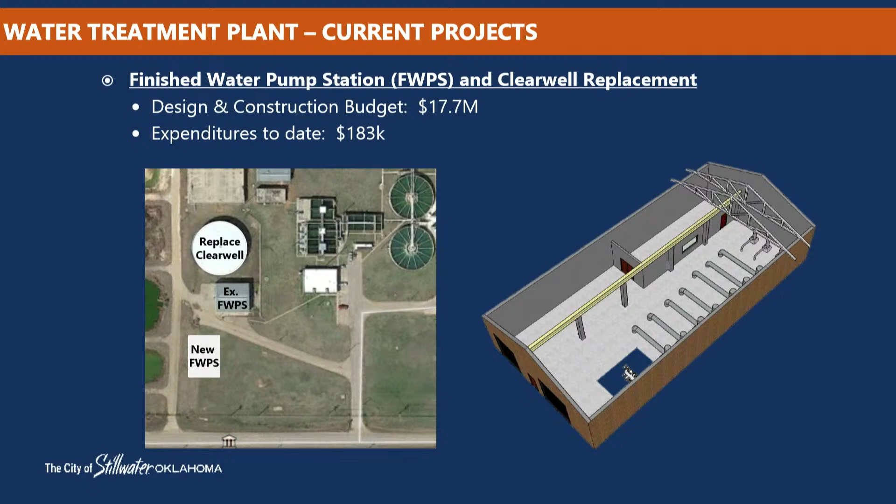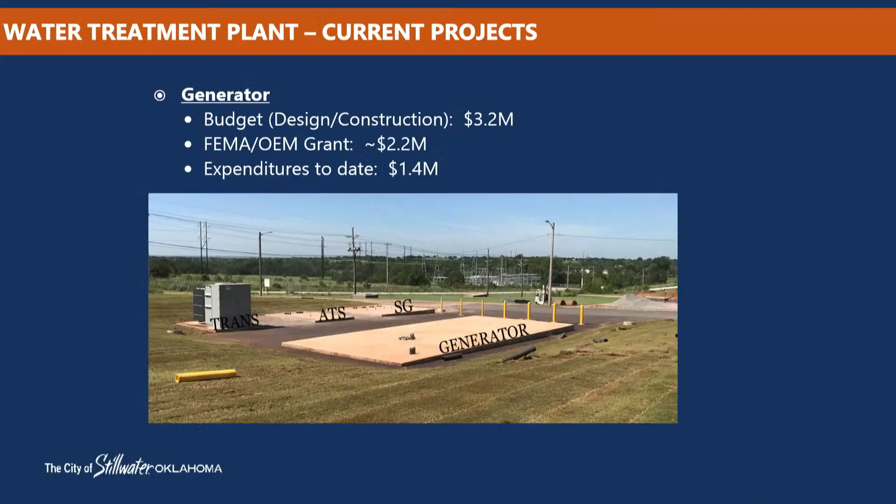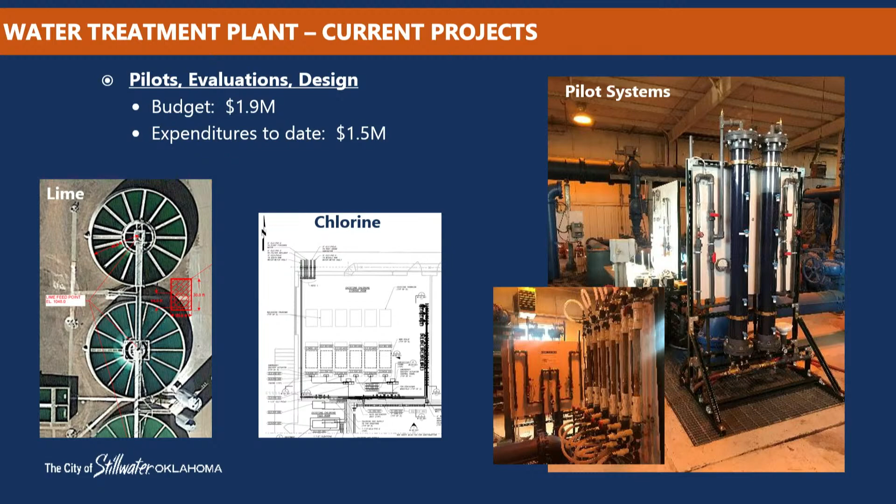This all started with that current project I mentioned, which began with the need to replace the lime system. That is this X right here. Lime is crushed limestone, and that's added in these three SCU basins.

Our plant is called a softening plant, and that's what the lime does - it softens the water and helps settle out solids, coagulate, and make it easier to flocculate the floatable solids. That's kind of the heart of it, in those SCU basins.

About the same time we started the project to replace the lime system, we had changes in key staff, and it came to our attention that there were a whole lot of issues out there. That project evolved into a full evaluation of the water treatment plant, identifying all our needs and prioritizing them. All these red X's are a summary of that - they indicate places where we have issues that need to be addressed.

Some of these, the X on the right, represents the chemical feed, particularly the ammonia. In 2017 we had a failure of the ammonia system, which resulted in significant consequences and a high cost to address. The lime system I mentioned frequently needs maintenance, and it's old enough that its spare and replacement parts are obsolete and hard to get.

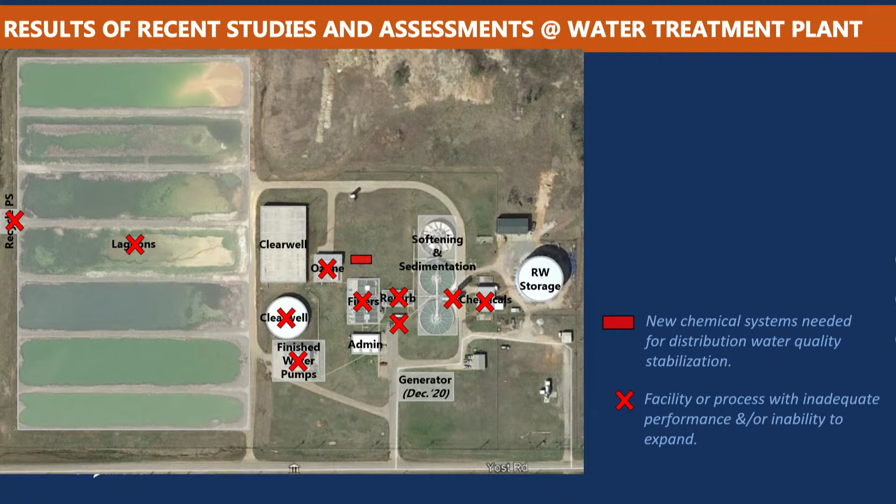Due to all these needs and the prioritization I talked about, we've developed a draft facilities plan with the help of a consultant. We've talked with you all about this previously. This is representative; we have some options we haven't selected finally yet. But this shows up in the box that improvements to the existing plant plus expanding it to a higher flow rate would cost about $70 million.

As we started the assessment we're talking about tonight, we wanted to evaluate needs that are not immediate but upcoming in the near future. Some of those I've mentioned: the residuals, liquid and solids, the finished water pump station, an administrative lab and electrical building, and some other miscellaneous items. So here we're looking at approximately, probably in excess of, 100 million dollars over the next several years in needs for the plant. So as we pulled together the facilities plan and realized the magnitude of the need, that's the time when we say, okay, this is a huge investment.

Is it time to reconsider whether we make that investment here or whether we look at other alternatives? So this also represents what we've been working on. This is our current path forward: improving the plant, making it the long-term investment that's in the best interest of our ratepayers.

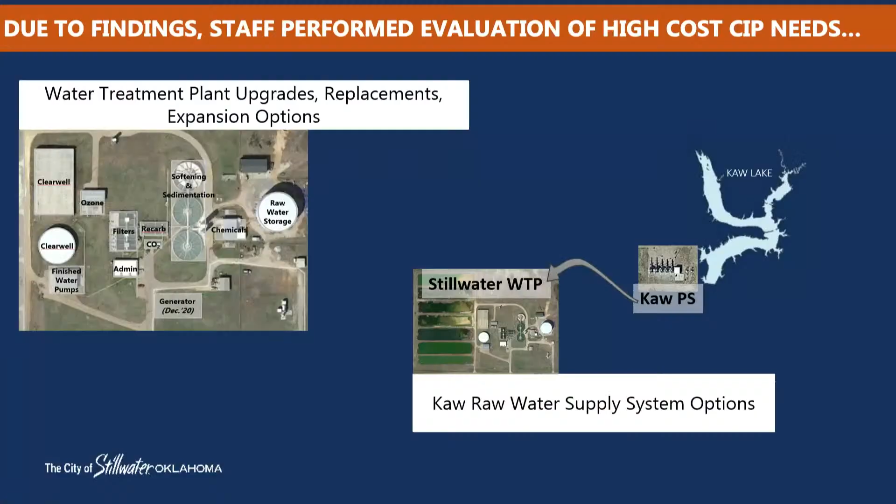Sorry Bill, can you talk a little more about whether that 24 MGD number is a goal for a specific reason? Is that what we think we need now, or a projection of what we think our needs will be in the future? Come back to this map: you can see the 3 SCU basins I mentioned, kind of almost in the middle. Each of those has a capacity of 6 million gallons per day. So when we think of increasing, the natural increase is to add another one of those to the north and increase the capacity by 6 MGD. So that's the reason for 18 and 24.

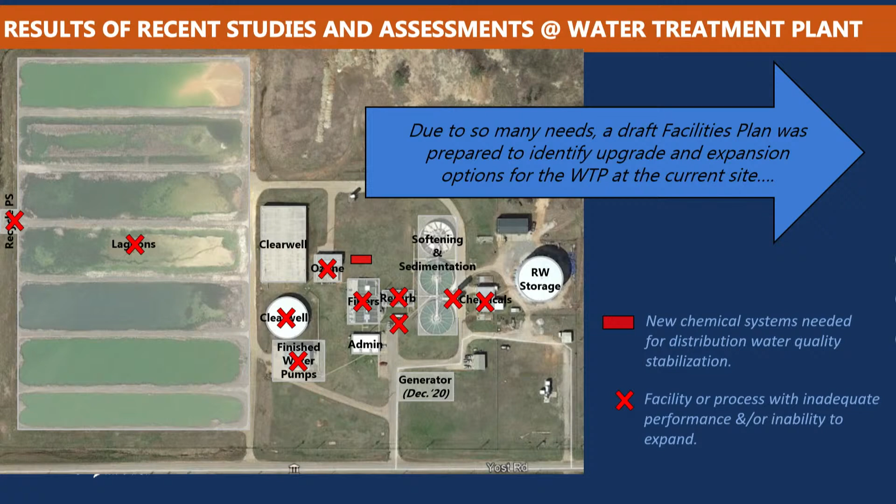We're not at the point of needing to expand to 24 today. We'll talk later about when we will be.

With the facilities plan I've talked about, we've told our consultant we're not ready to go to 24, but we expect it's going to happen someday. So if we're designing a new facility, a new filter complex, we want to design it so it's ready for 24, or so it's easily expandable. We don't want to build a new one for 18 and then in 5 years be going, okay, we're ready for 24. So the turquoise color at the 4th SCU at the top there, and that meter vault, are essentially the only new infrastructure we would need at this plant to go to 24.

Now, we need a lot of rehab and upgrading of other things, but beyond the current rehabilitation project, that would be the only thing to add to make that plant ready for 24 - plus some additional pumps, small facilities inside a building that's been set up and ready for it. Does that answer your question? Yeah, it does. Thank you.

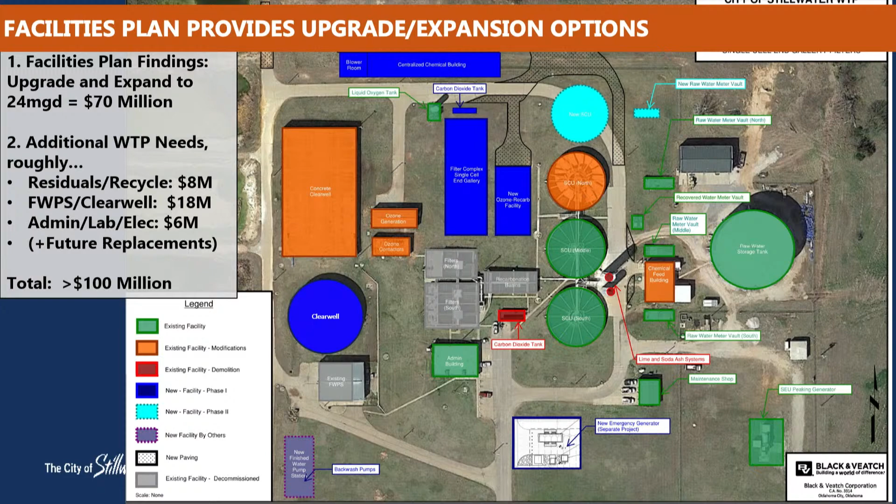So the four options - I'll start with number one, which relies most heavily on the existing plant. We rehabilitate, upgrade, and replace a number of facilities at 18 MGD, being prepared for 24, and then at some point we will expand to 24 MGD. We stay with the existing site. We design the new facilities for a 50-year life.

We've estimated when that expansion to 24 will come. We've estimated other small improvements that may need to happen sometime - something that's in good condition now, but we don't expect it to last for 50 years. So just to be clear on that, 50-plus year life is 50 years after all of those things are completed, right? Not 50 years total. In other words, if the plant's 40-plus years old now, we're not getting an extra 10 years out of this. Right.

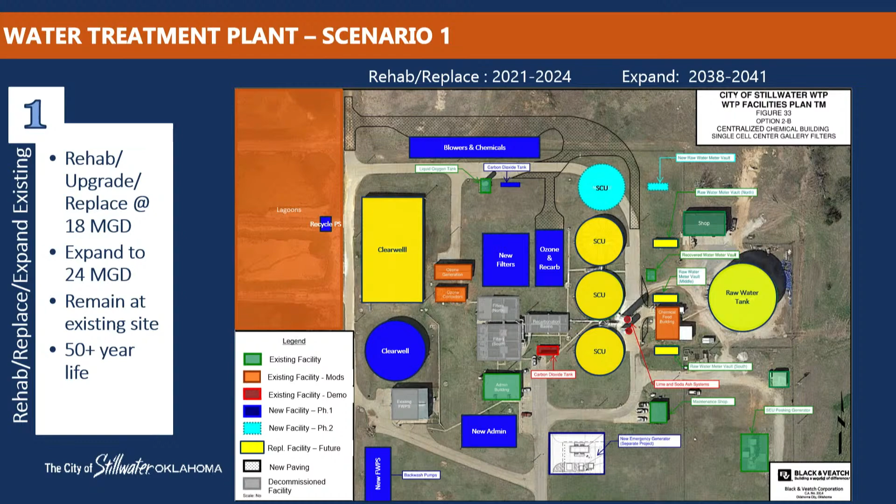So expansion to 24 MGD, roughly at the year 2038. Scenario 2 would include limited rehab at the existing plant, less than what we would do under scenario 1. There may or may not be room on that site to expand or build a new plant, so we're assuming we'd have to acquire a new site. We would build a new water treatment plant, but in 2 phases. The first phase would be 12 MGD, roughly 2031. And then a second 12 MGD part of the same new plant in roughly 2041. So during that period from 2031 to 2041, we're running 2 plants, but kind of phasing out the existing treatment plant, putting less investment into it, probably using it more as a peaking plant during the summer rather than all year.

Moving to scenario 3, similar to 2, it's a new 24 MGD plant, but we build it all at once in the year roughly 2031. This is essentially the same limited rehab at the existing site, and once the new plant is constructed and online, we would abandon the existing treatment plant.

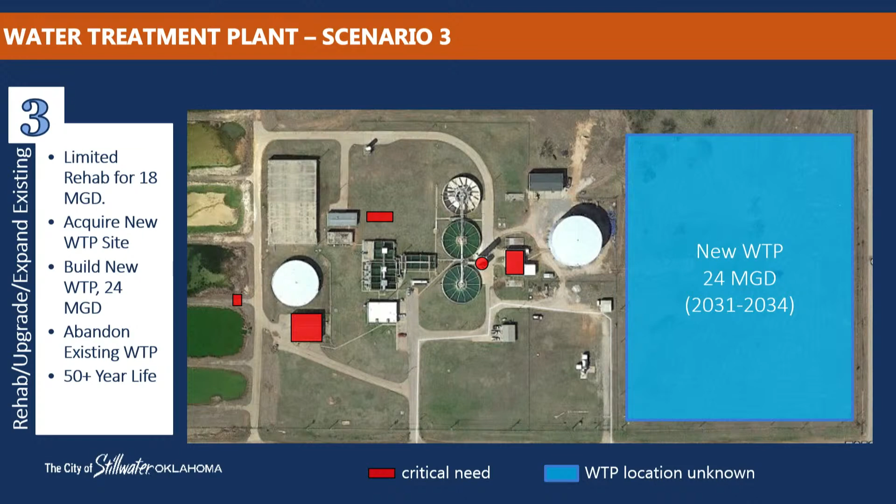Scenario 4: we do no rehab at the existing treatment plant. We just keep it running. We construct a new plant starting now, instead of 2031. And then once the new 24 MGD plant is online, we abandon the existing water treatment plant.

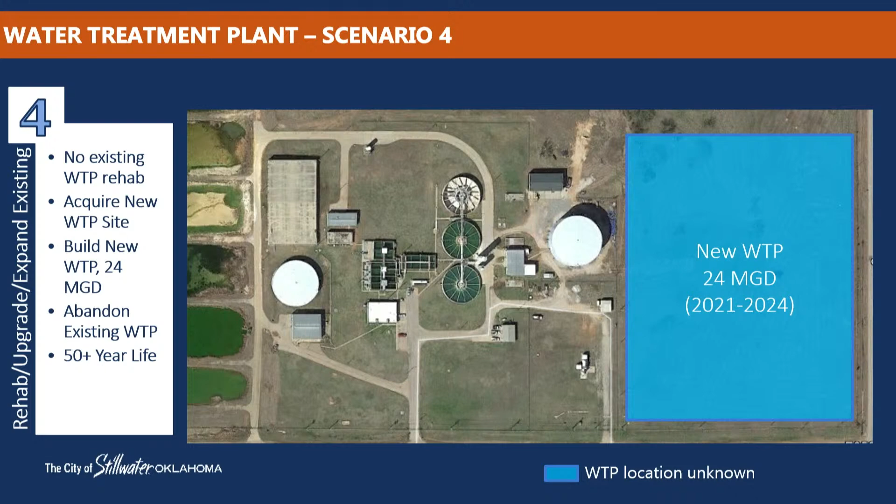This slide just brings them all back together, hopefully making it easier to visualize the differences. So looking at these options, we developed them to wrap our arms around the issue and the potential scenarios, but not to select one of these. That's not the main question here. Probably the key question is whether it's time to move toward building a new water treatment plant, and whether we have enough information today to make that decision.

So, Bill, can I ask a question real quick? Sure, and maybe this is something that can be answered later. You're right, we're not having to select a solution tonight, 1, 2, 3, or 4. And maybe this is a silly question, but you will know the answer to this. Do you think water technology is going to change a lot in the next 11 years when we're talking about 2031? Do you see anything significant to where we would wait 11 years to start something, as opposed to starting something now and building on as technology changes? Do you see one way or the other as far as what would be a better thought process? Does that make sense? Yes, I think so. But thanks for setting me up, though, telling me I would be able to answer the question.

Just briefly on these scenarios, in terms of the difference between a whole new plant and upgrading the existing plant. When we look at scenario 1, with all the different things that would be either replaced or upgraded, once that rehab and replace timeline, 21 to 24, is done, would the facilities at the existing treatment plant still not be as good as they would be if we built new?

And why would they not be? I mean, simplistically, I'm looking at it like a Lego sort of building, where you pull out that old piece and plug in the new one, and now that new piece is just as good as it would be if you built a brand new plant. If we're pulling out the old bad stuff and putting in new good stuff, why is that rehab plant not at the same level as a new plant would be? Does that make sense? Partially because all the Lego bricks may not fit right back in the same slot.

Okay, so we're not upgrading or replacing every facility at the water treatment plant. You've got piping, wiring, a lot of connections, things that are feeding different directions that maybe you would put, if you were doing a new plant, side by side, but when we're rehabbing, you can't do that because there's no room.

I can't think of a good example, but we're not replacing everything. If we were replacing everything, then you'd be spot on. So it's like a home remodel: instead of tearing the whole thing down and building it brand new, I'm putting new stuff in, but my old layout may still be kind of wonky. I really wish my laundry room was on the other side of the house, but I've got a new washer and dryer, and the layout's still bad. Or your foundation wasn't so good, and so you're potentially, the good bones metaphor that Monty used earlier is part of that.

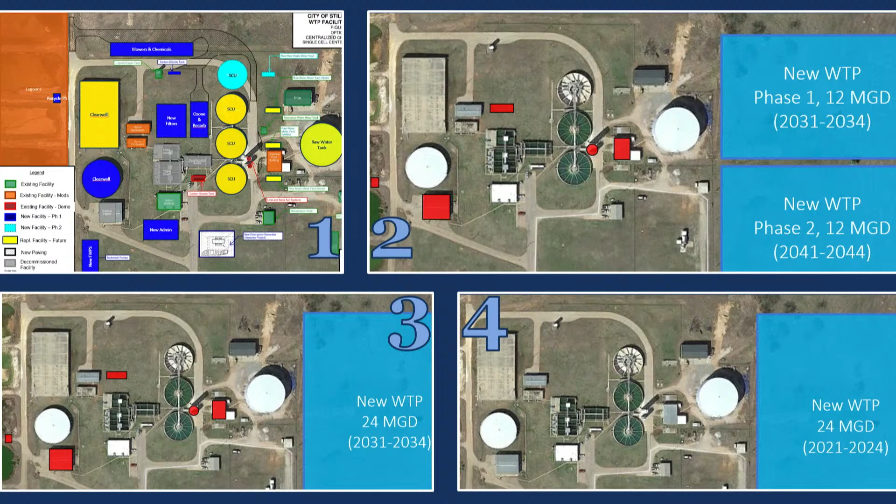Okay, anything else on the scenarios? So at Kaw Lake, we have 50 MGD of water rights, so in that regard we're set for the foreseeable future. We have completed water line and pump station improvements based on an evaluation back in 2012.

And currently we are developing an RFQ, kind of along the same lines that I talked about improvements at the water treatment plant. We're doing the same at Kaw and developing this RFQ to further evaluate and recommend action on the next steps to rehabilitate the Kaw water line.

They were constructed just a couple of years ahead of the water treatment plant. The water line, as you've probably heard in the past, needs attention to rehabilitate its condition, and it will not carry 24 MGD. It'll carry our current treatment capacity of 18 — I think it carries about 21.

There are challenges to a more in-depth evaluation of the condition of the water line. That's why that wasn't completed in 2012.

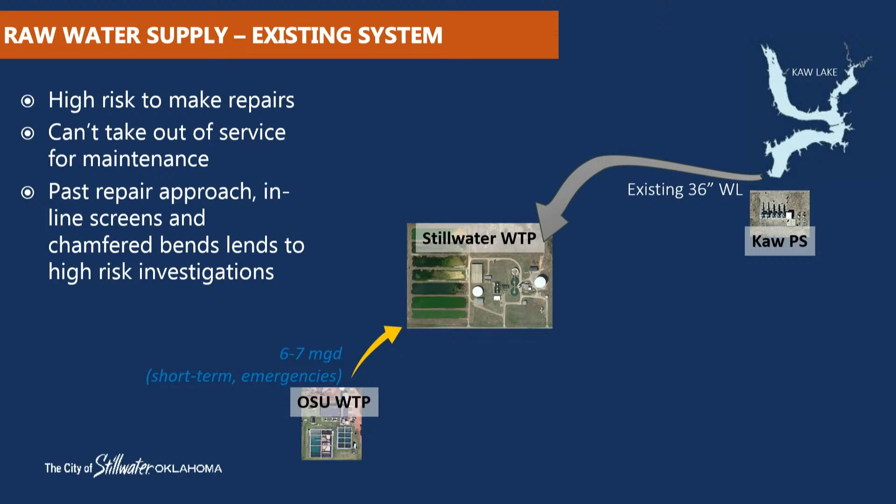Yes sir, in that there is no redundancy in the pipeline. But the pump station, for instance, has multiple pumps — there's 5 pumps, 2 large and 3 small. So the 2 large are redundant, so if one of them needs repair or fails, you switch to the other one. You use the 3 smaller ones seasonally, switching between the 2 sets of pumps. So we have some redundancy there.

And through these scenarios we'll talk about condition, capacity, and redundancy. So unlike the water treatment plant scenarios where all 4 options were equal, these are not. For instance, redundancy — I'll explain it as we go through them.

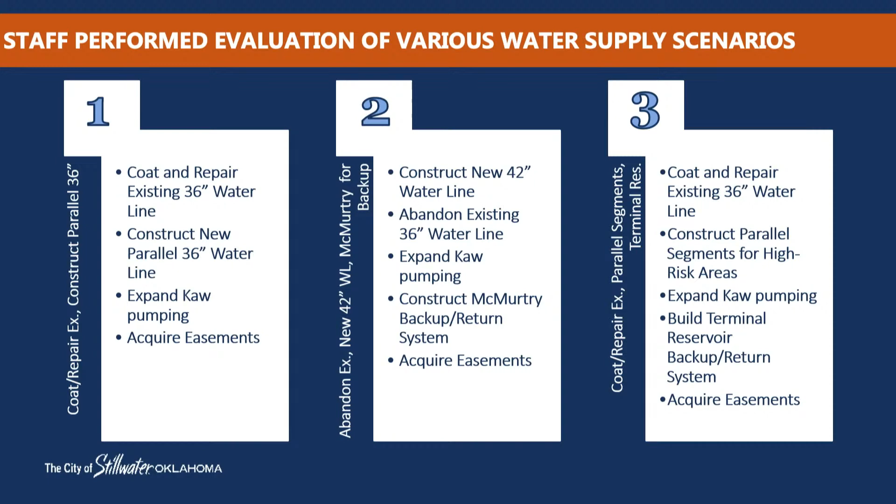So looking at scenario 1, it would include coating and repairing the existing 36-inch water line, constructing a new parallel 36-inch water line, and expanding the Kaw pumping station. So as you just mentioned, Trustee, having 2 lines, now we're not down to one weak link, we can switch back and forth. However, in that scenario, we're still vulnerable to a pump station outage or a lake outage, if something quality or water quality wise or mechanical happens at the lake.

And note there at the bottom of the screen, I've got the OSU water treatment plant. We have an agreement with OSU to back each other up in times of need. They can, and both are able and willing to do that. The issue is they could not support us in the summer — they just don't have that capacity. So in the winter, for a planned outage, and for short times at other times of year, they could help back us up.

Scenario 2 includes a new 42-inch water line, abandoning the existing 36-inch water line, and expanding the pumping, just like with scenario 1. But this also includes developing the infrastructure to utilize Lake McMurtry as a backup system.

You mentioned on these options, mixing and matching. There's the water line issue itself - do we build a parallel, do we build partly parallel, do we just replace it with a new one? That seems separate from the reservoir issue - do we build our own reservoir for storage, do we connect to McMurtry? From the perspective, it seems fairly straightforward: building just segments of parallel would be the cheapest option, building a second 36-inch line parallel would be the second cheapest option, but replacing the whole thing with 42 would be the most expensive. Is that right?

Possibly, I don't remember the numbers, because if we build the parallel, the 36 is cheaper than a 42, but we'd have to rehab the old 36. So that adds some of the cost. Whereas if we build the 42, we're just getting rid of the other 36. Correct. What's the difference in capacity if we had one 42 versus two 36s? Is it linear?

Two 36-inch lines are... well, it's not linear for that size. It's linear for the cross-sectional area of the pipes. Sure, two 36s would definitely carry a lot more than one 42. The right thinking with that is...

When you've got two 36s with either line, say in the winter, you could just use one and rehab the other. So each line has to be big enough to handle the average flow. You said right now the current 36-inch line has a capacity of about 21 million gallons a day. Yes, sir. So would we normally use one at a time, or how would that work? Would they both be flowing? Yeah, until we grow into needing all that capacity, we'd probably use both to keep them both in service, but we could get by on one or the other if we needed to shut one down and fix it. Correct.

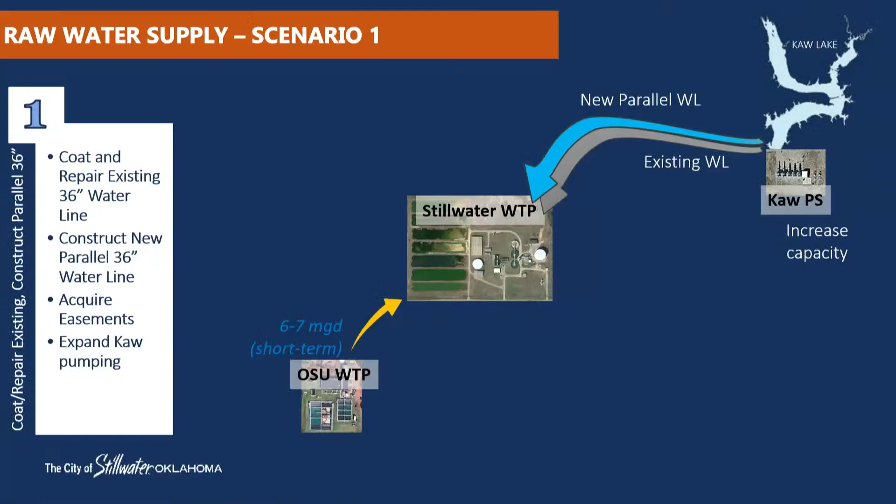Would it make sense to do that in stages? If we're talking about just doing segments of parallel lines now on the most critical areas, then over the next several years we continue to add sections so we eventually end up fully parallel. Yeah, that could be a hybrid between option 2 or 3, scenario 3 and option 1 — either of the other ones. Could be the first step towards that.

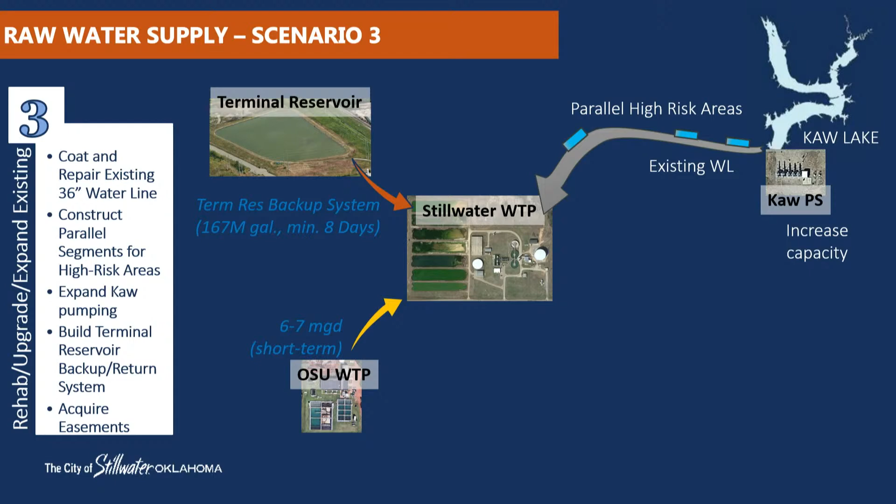I think what this would do is it doesn't increase your odds of having a line break, but it decreases your odds of having a catastrophic line break that you can't fix, and one that takes a very long time.

And just to be clear, the money in that slide is in addition — none of that's cumulative with the water treatment plant itself, right? Correct.

Wishful thinking. Yeah, nice try. At least they're not as big.

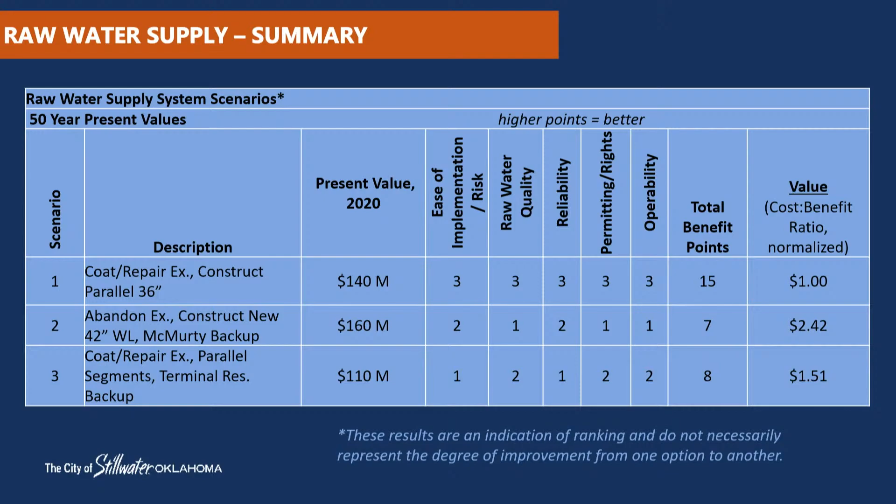Okay, now I'd like to talk a bit about the capacity that we've alluded to several times. Currently at 18, and we believe that as a growing community, we're going to need to expand to 24 MGD someday. That is not imminent, but how do we know when it is?

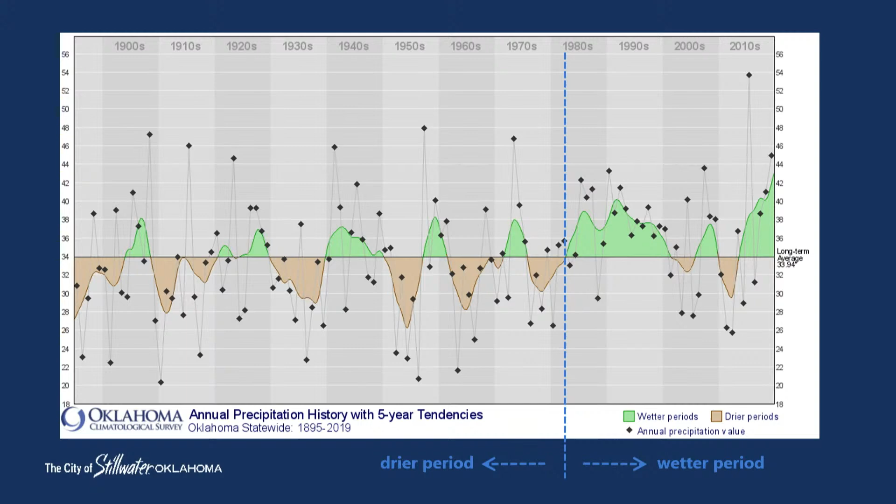We can't say that with certainty, but it seems to make the data make more sense. There's also in the last 30 years a pretty big expansion in water saving technologies, right? My toilets and shower heads and all that stuff are conserving more water than they did 10, 20, 30 years ago. That could be part of it. Could be better water devices, could be more environmentally conscious customers, or as rates have gone up over time, people have become more cost conscious and cut back to save money. So a lot of things can go into it.

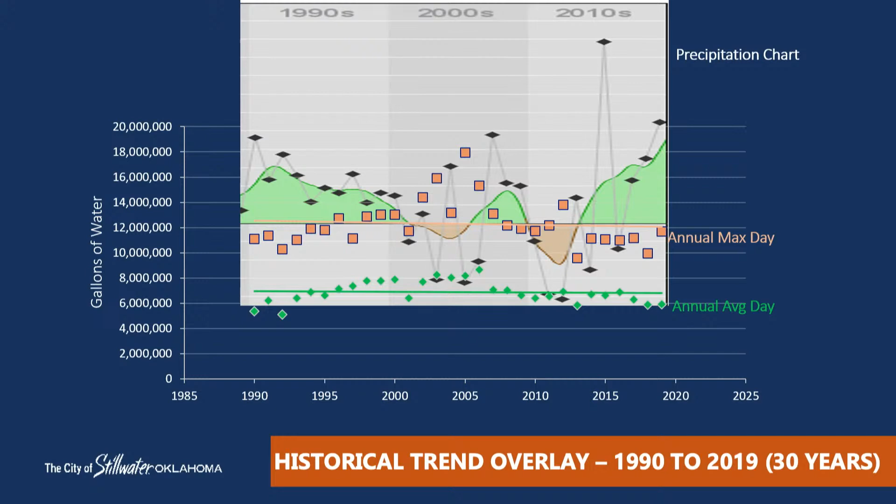We're set up for 18 MGD now, but the pump station only pumps about 14, and we're only using on an average day 6 or 8. Is there an issue with the percentage of the demand of your plant that you're actually running through it? Like if you've got a 24 MGD plant but you're only running 8 a day through it, does that cause issues? I'm just trying to think of other systems, sometimes if you're not using them at capacity, you're not optimizing.

Correct, no, that would not hurt. What we'll do, we looked at the 3 SCU clarifiers earlier: you ramp one up and use it, and when your demand's down, you turn one off. So you probably lose a little efficiency, but mostly if you only use it at 75% of capacity or 50%, you've just overinvested. There's not particularly harm in it.

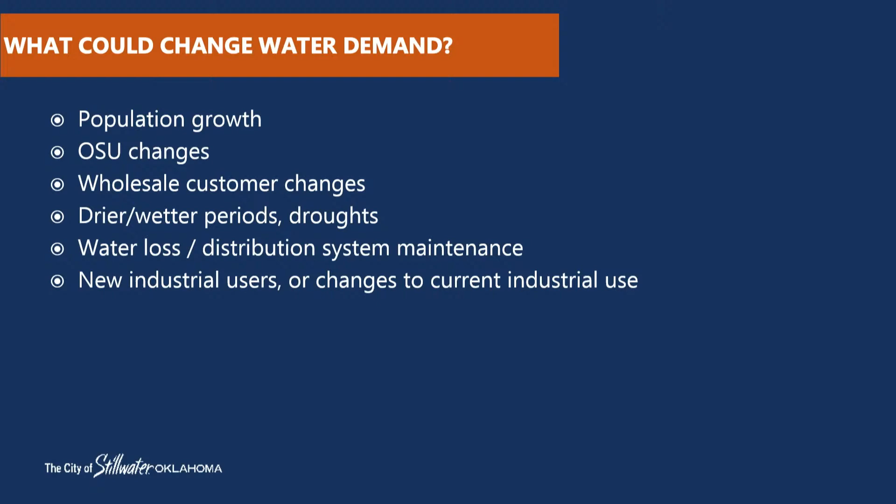Trustees, councilors, any questions for Bill?

One last question, Bill. With that last comment, if you overinvest in a system like this, does that extend the life of the overall system? For example, with the SCUs, if you're only using them half the time, does that increase the lifespan of those devices or structures, or does that not have any bearing? I think it could go both ways. Maybe you're not maxing out your pumps and motors all the time if you're not operating at capacity, but I don't see that being a huge issue. On the reverse, if you're not using it, it's kind of like if you buy an extra car and just leave it sit in the driveway, it's going to deteriorate anyway. So I don't see going easier on the equipment as being a big factor.

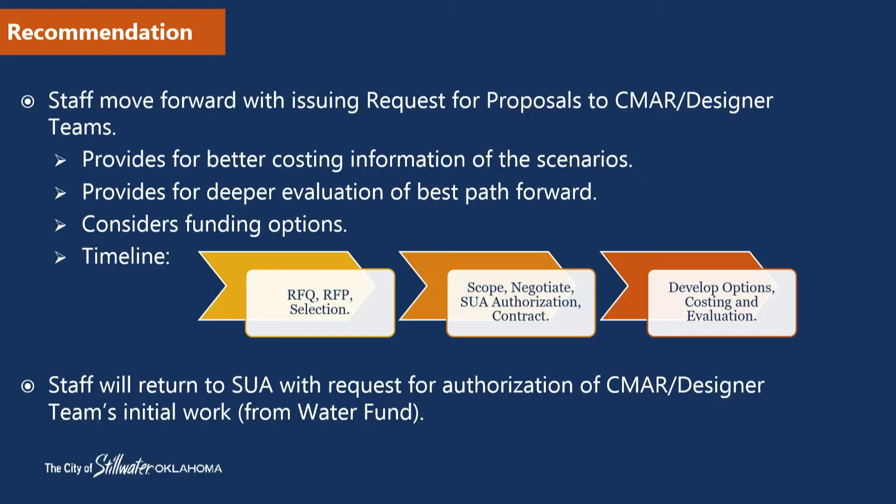I think the advantage of the style of plant that we have, the solid contact unit and the 3 trains, is they're designed in 6 MGD trains. So basically, Thomas can turn one off. I think the minimum is about 4 million you've got to have to run through those, so he's got to have at least 4 million to run through one, but he can go up to 6. So he's got flexibility there before he has to add the second one.

Go ahead. Sorry, is there a sweet spot? Like if your average is 8 a day, or your high might be 10 or 12, that you want to build at least 18 just in case? Is there any kind of standard around how that number gets calculated based on your usage?

In terms of what you think your capacity is going to be, and then how long is that peak going to last? And then you have to match that with your filters, and match that with your pumps, and with your storage. And then you put all those pieces together, looking at a peak day 50 years from now. That'd be a good job. With a crystal ball, yeah, right?

I'll just add a little bit if I could. There's kind of a rule of thumb in the industry that when you hit 80%, maybe 75, but 80% of your peak capacity, that's when you start planning for an expansion. But it also kind of depends, if you wait too late to expand, you risk having development catch up with you and getting to the point where you couldn't accept a new industrial customer or new meters because you've maxed it out. That's it. Good point.